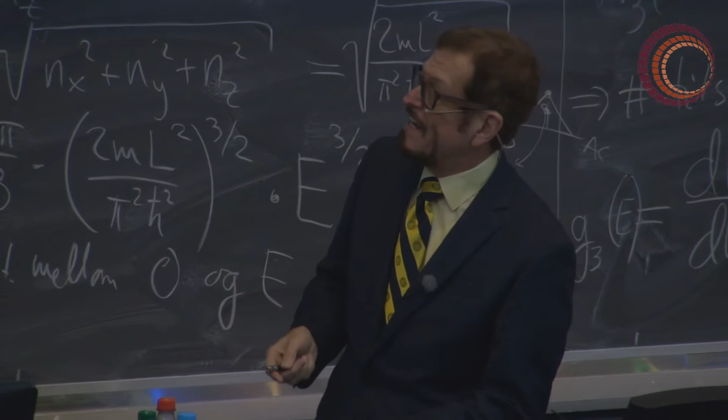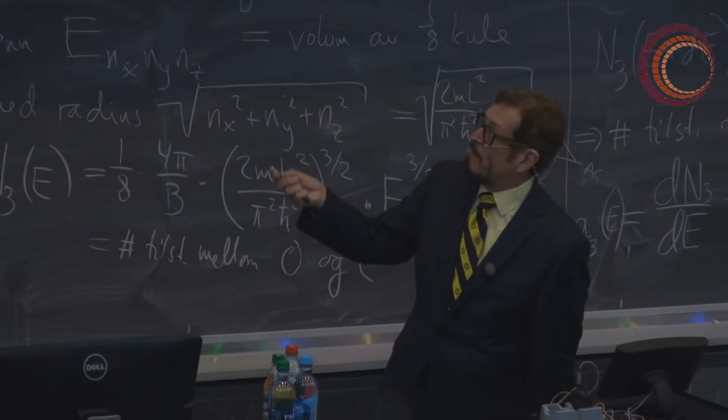One thing I find in all my teaching of physics is that even if you've never taken a physics class before, you're an expert in physics. You're guaranteed to be, because even if you never took any physics before coming to university, you have 18 years of practice doing physics: running, jumping, skiing, turning switches on and off, catching baseballs, and you put together in your head a common sense picture of the physical universe. And the problem is it's completely wrong.

And that's part of the reason why learning introductory physics is so hard, because you have all these incorrect ideas in your head. That's why in our textbook, we have lots of so-called caution paragraphs alerting you to common misconceptions. We're going to try to see what some of those common misconceptions are today associated with flying. And we'll introduce some new ideas for you as well.

So we're going to talk a little bit about what it is that makes an airplane fly. There are lots of misconceptions associated with that. We'll introduce the idea of lift, the force that, for the kind of flying we're talking about, acts vertically against the force of gravity. We'll talk about drag, which we'll find is more than just air resistance. Unlike air resistance, which gets more important the faster you go, there's an important type of drag that gets more important the slower you go. And we'll talk about why different wings are shaped in different fashions for different purposes.

So let's begin with the question of what is it that makes an airplane fly? That's an excellent question. I know we have some really expert physicists here in the audience. So for instance, our friends here from Oslo, you can tell me what is it that makes an airplane fly? Not to put any pressure on you, of course.

It's the force that pushes it up. Well, that's part of it. That's part of it. Well, let's see. Some of the locals, what do you think it is that makes an airplane fly? Airflow or the wings. Well, again, that's part of it. Let's see. Are there any pilots here? Because I guarantee if there were pilots here, they would know the answer.

Particularly if you're a private pilot and you fly yourself, you know the one thing that actually makes an airplane fly is money. The statement goes, if God had meant man to fly, he would have given him more money. And it's also said, I know there's money in aviation because that's where all of mine went. So whether you're paying in kroner or paying in dollars, it is an expensive thing to do.

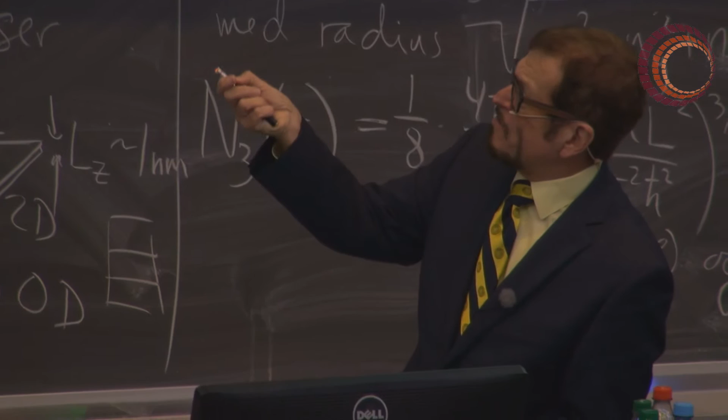Where does lift come from? If you look at detailed explanations of lift, you'll see all kinds of discussions that involve Bernoulli's equation, things that involve the Navier-Stokes equation, and it gets really complicated. But fundamentally, the simplest way to think about lift is it's Newton's third law of motion. And the third law of motion says if A pushes on B, B pushes back on A with exactly the same amount of force in the opposite direction. And that fundamentally is what the wing does.

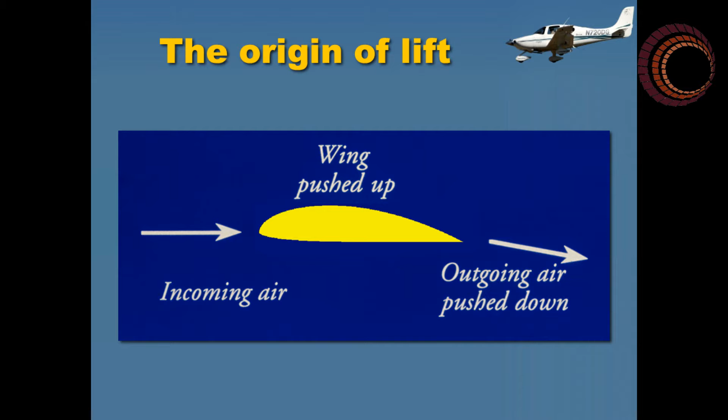The wing is simply a device that takes the air, from the frame of reference of the wing. If you're sitting in the airplane, the air is rushing toward you, and all the wing does is take it and push it downward. So because the wing pushes down on the air, the air responds by pushing up on the wing. And fundamentally, there's nothing more to it than that. That's all the physics there is, really, for the physics of flight. But there are a lot more details with that, of course.

Well, here's some really good discussions going on here, which is great. And actually, as I say, that's the way I teach my classes. Most of the time in my classes, the students are actually discussing physics with each other. And I'll do that with a class of 300 students, so it's a pretty exciting place to be. And this is a pretty exciting place to be because I heard all these great discussions going on.

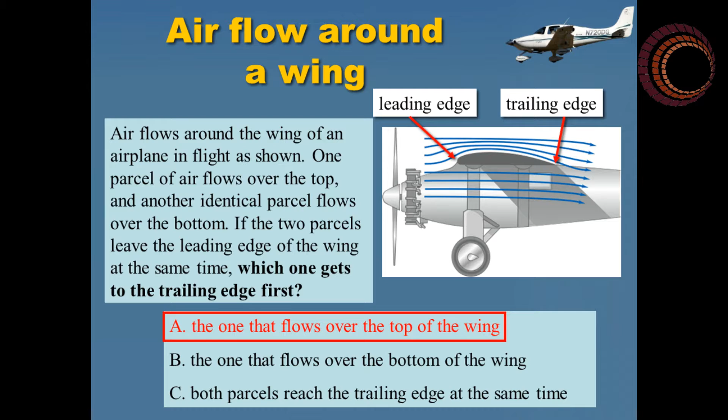The air that flows over the top of the wing actually goes much faster than you might be led to believe. Some people think that because the top of the wing is curved, the air has to travel a greater distance to meet up at the trailing edge, and that's why it goes faster. In fact, the real speed is much faster than that simple model would lead you to believe.

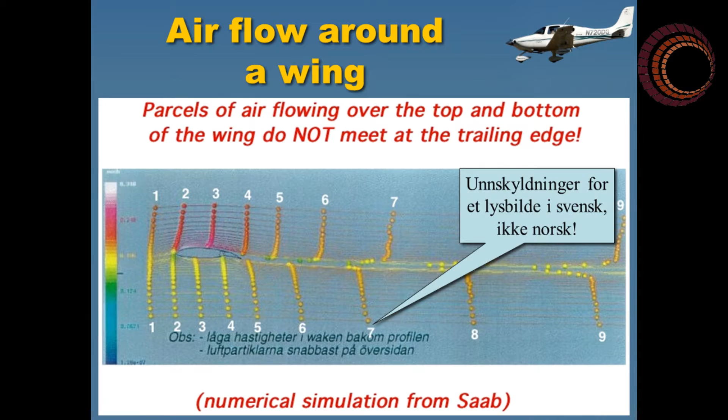And when I show this slide, in the States, people just say, what is that funny language? For you guys, you know what funny language is, but I do have to apologize, of course. But the best I could do.

So air definitely goes faster over the top, and really only the air heals up quite some distance behind the wing. And we'll talk later on about what happens some distance behind the wing. So now we have this picture of what's actually happening with the air. It's going really fast over the top and getting deflected downward because of the manner in which the air flows. It turns out a big part of getting the wing to push the air downward is, in fact, the wing shape. So let's talk a bit about the wing shape.

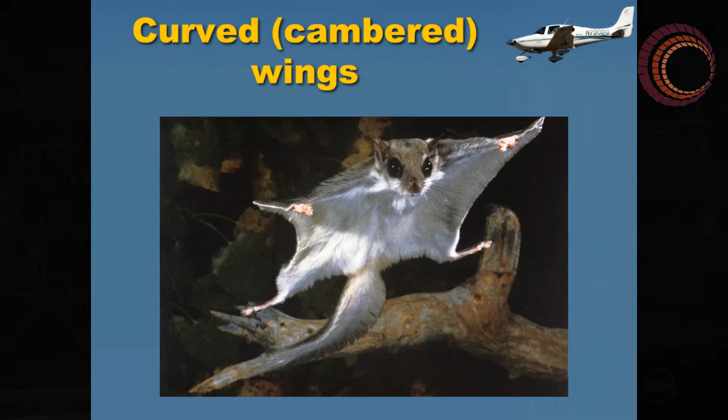In fact, here's a natural wing. This is what you find on a flying squirrel. And you'll find these across northern Europe as well as in the United States. These guys don't really fly. They just sort of glide in a controlled fashion. This is a species of squirrel that will climb up one tree, and instead of having to walk down to the ground to go to the next tree, it says, that's too hard. Let's just fly from one tree to the next.

And so he has this natural wing, and you'll notice we say it's cambered. So it's curved down at the front, so from the side it'll have a curvature like this. And that turns out to be a natural form that as the air follows the curvature of that wing, it'll naturally get pushed downward, and that produces a lifting force that enables this guy to glide.

That's why the earliest airplanes were biplanes, ones with two wings, because they thought the wings had to be very thin in order to be efficient, like the wing of a bird or like the wing of a flying squirrel, and they didn't know how to make a wing that was both thin and strong.

It was actually only during the First World War, actually from research in Germany, that they discovered that no, a thick wing can actually be just as efficient, and that led to the transition from two-winged airplanes to the single or monoplane airplanes that we have today, where you can have the wing thick enough to have enough internal structure that it will hold itself up without this kind of bracing.

It also depends on the dynamic pressure. And that's the pressure you feel as you're running along or you're skiing at high speed or bicycling at high speed. That's the pressure you feel on your face. Mathematically, the dynamic pressure is 1/2 rho v squared, that factor that shows up in the Bernoulli equation, and which depends on the density of the air and the airspeed.

So the greater the air density, today the air is relatively dense because the air temperature is low, so the air density is high, and the faster you go, the more dynamic pressure you're going to get.

Also, any good physics equation has to have a fudge factor. There has to be a factor inside that absorbs everything that's too complicated to write down in a simple equation, and that is what we call the lift coefficient. That depends on the way the wing is shaped and also depends on something called the angle of attack. So what's that all about?

So angle of attack sounds very military, but it applies to both military airplanes and civilian airplanes and to birds as well. It's the angle between the relative wind and the chord line. The relative wind, if you're sitting in the airplane, is the way the wind is blowing over you. So if you're in straight and level flight, that direction is horizontal. You'd see the wind coming toward you going horizontally.

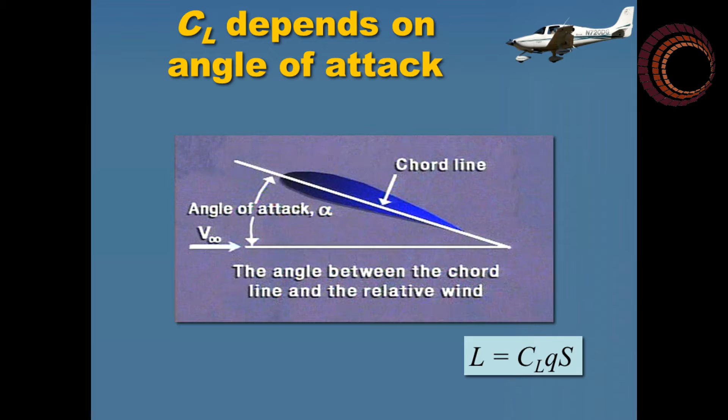And the chord line is an imaginary line from the leading edge of the wing to the trailing edge of the wing. The wing may be curved, but you think of this as just a straight line from the leading edge to the trailing edge. So the angle between those is called the angle of attack. So if the wing is biting into the air at a steeper angle, that's a large angle of attack. If the wing is at a relatively small angle, that's a small angle of attack.

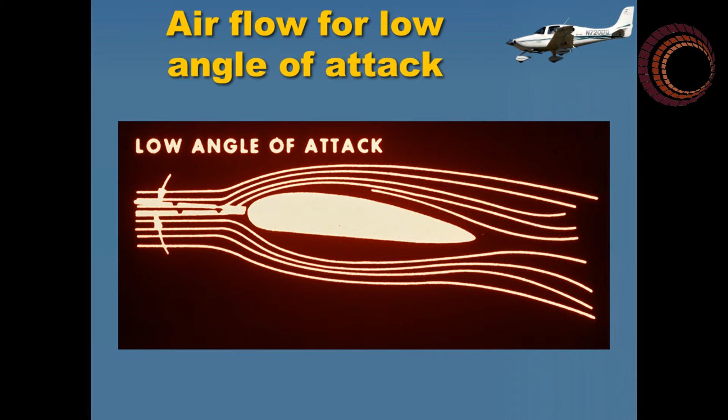So how does the lift coefficient depend on that? Well, generally speaking, to get more lift, you want to increase the angle of attack. At a low angle of attack, you can see in this illustration, the air gets pushed downward, but it doesn't get pushed down very hard. But if I increase the angle, the air following the curvature of the wing will be pushed down by a steeper angle. You may be going at the same speed, so the dynamic pressure is the same.

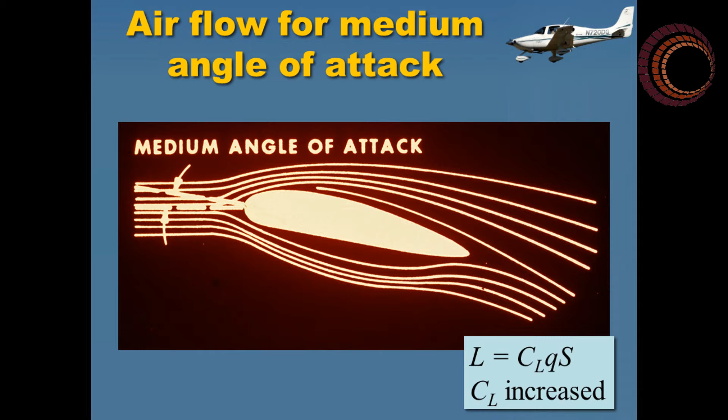You haven't changed the wing area, but by increasing the angle of attack, you've increased the lift coefficient, and you've now increased the amount of lift. So generally speaking, all else being the same, if you raise the nose a little bit as you're flying, you can get more lift out of the wing.

If you're flying slowly, you need to increase the lift coefficient. The reason is if you're flying slowly, as you might be when you're coming into land, at those slow speeds, you want to be going slowly so you can get stopped in a relatively short distance. You don't want to have to use 10 kilometers to stop the airplane because runways don't come that long. So you need to be going relatively slowly as you're flying along.

That means the dynamic pressure is decreased. Remember, the dynamic pressure Q is less the slower you're going. So at slow speeds, Q is less, so to make up for that, to keep yourself flying, you still need lift because Q is smaller. You actually have to increase one or the other factor. And in these airplanes, we're actually increasing both.

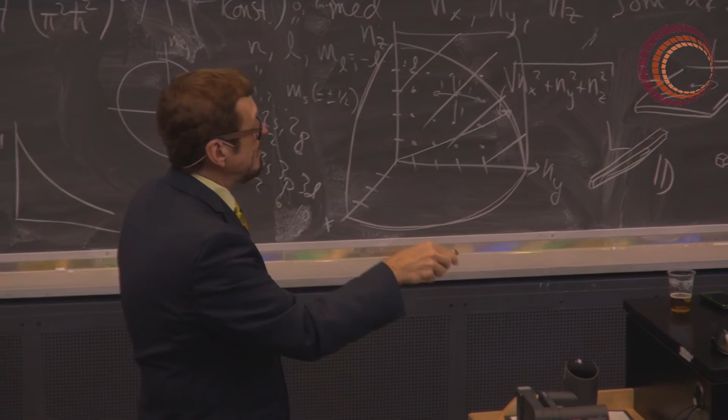And so he's at a low dynamic pressure because he's traveling slowly, but by increasing the lift coefficient and by increasing the wing area, that's just what it takes to enable slow flight. So it's exactly the same thing that you see with an airliner coming into land, where they have the flaps down, increasing the wing area and increasing the wing curvature, so that both the factors C sub L and S are increased to compensate for that decreased dynamic pressure Q. So as I said, lots of analogies between airplanes on the one hand and birds on the other.

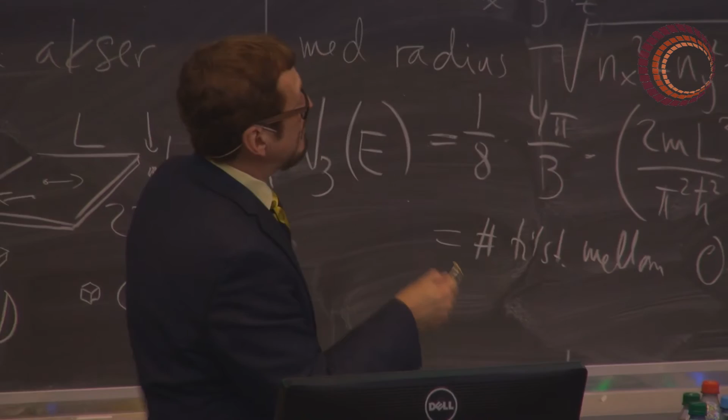To see more about this stuff, the ideal thing to do is say, let's go for an airplane flight. So if I had a little more advanced planning for this talk, I would have arranged a sufficiently large airplane to take everybody. But, well, let's do something almost as good. Let's go fly in an F-16. So one way to do that, of course, is to talk to our friends at the Royal Norwegian Air Force and say, I have some friends who want to go for a ride. Can we make that happen?

And so he could just wander over to Ørland and say, can I get a ride in one of these airplanes? A bunch of times you fly around with nobody sitting in the back seat, so can I take my friends along? And they might not respond in a positive way. But nonetheless, we can imagine doing that.

So imagine we're over there, and we're holding short of the runway, ready to take off, and you'll notice one thing you find on any of these jets is a large display in front of the pilot, and that's called the heads-up display. And that heads-up display is actually arranged so that the pilot doesn't have to look down at the instrument panel to see what's going on. The pilot instead can look straight ahead while flying the airplane and see the key information projected up there.

So in particular, on this heads-up display, so-called because you can keep your head up, you don't have to look down to see the key information you need, we're actually going to use the heads-up display. We're going to do an experiment. And the experiment we're going to do is we're going to take an F-16, and we're going to bring the power back to idle. So the airplane is going to want to slow down, and we're going to tell the pilot, okay, the power is back, your airplane's going to be slowing down, but let's maintain the same altitude. What will it take to do that?

So based on what we said, as we slow down, the dynamic pressure, Q, is going to decrease. So we're going to have to compensate by increasing the lift coefficient, C sub L. And to increase that lift coefficient, I said that that should increase with an increasing angle of attack. So let's see whether that's true or not. So we're going to look through the heads-up display as we do this. And so here's what we're going to see on the display.

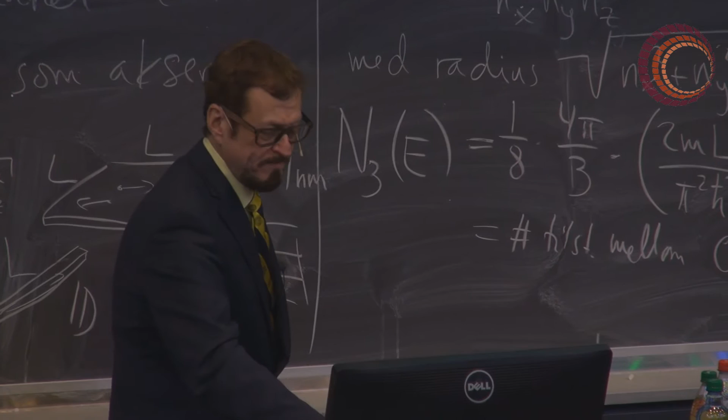So in the video I'm going to show you, you'll see both the heads-up display the pilot sees, and we're also going to see the airplane as viewed from the side to see the way it looks as seen from outside. So we'll get both inside the cockpit view and outside the airplane view. The key numbers to look at over on the left-hand side, you'll see the airspeed calibrated in knots, which is a funny unit, but it's a little bit less than 2 kilometers an hour. Over on the right is the altitude in thousands of feet. I apologize for English units. Nothing I can do about that.

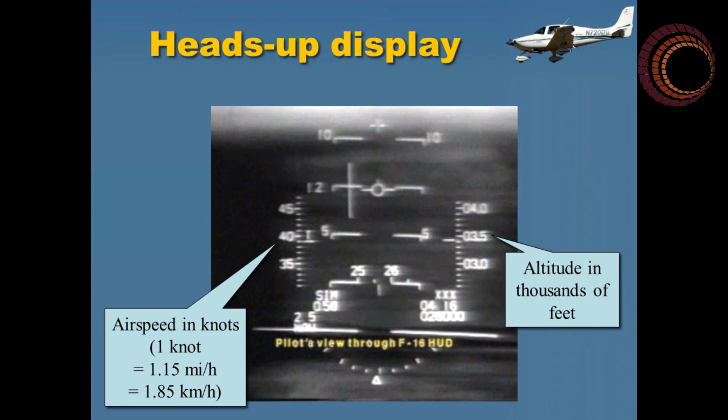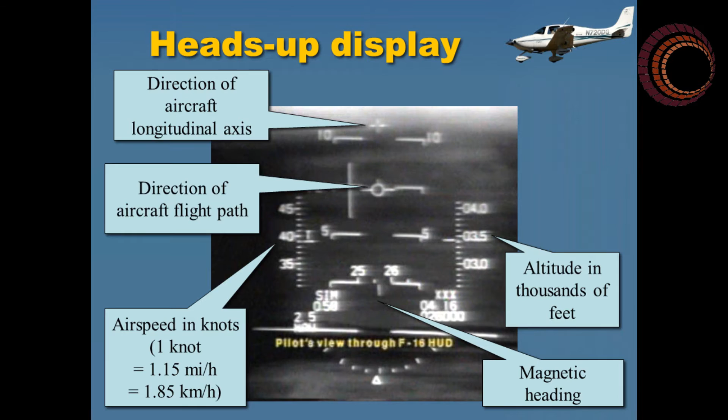We're also going to have our heading. Our pilot's going to try to keep the airplane going in a straight line, so that heading should remain constant. And the X will represent the direction of the longitudinal axis of the airplane. So basically, that's showing you where the nose of the airplane is pointed. Whereas the round circle is going to show you the direction that the airplane is going. The angle between those two directions, that's the angle of attack. Basically, it's the angle between the way the airplane is flying, which should be horizontal, and the way the nose is tilted up. The angle between those is essentially the angle of attack, the angle at which the wing is biting into the air. So let's see how that behaves.

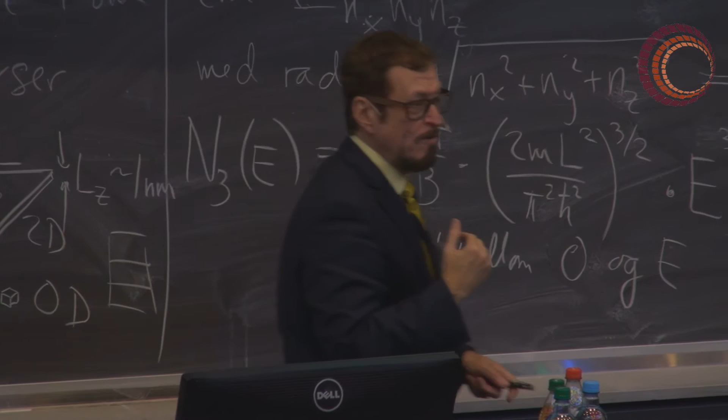And in particular, I want you to look at the relationship between the angle of attack on the one hand and the airspeed on the other. As the airplane slows down, we're going to find we're going to have to increase the angle of attack. We're getting less air per second flying over the airplane. And so to compensate for that, we have to take the air we encounter and push it down harder with that greater angle of attack. So let's see if that's actually what happens here.

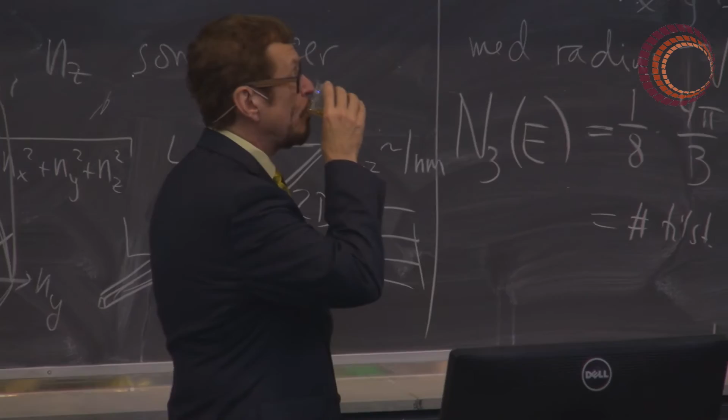What must a pilot do to maintain level flight when decelerating with idle power? Determine the relationship between angle of attack and true airspeed for this decelerating F-16 in idle power and in level flight. AOA is 3 degrees at the outset. True airspeed now 390. 3 degrees holding on the AOA. Coming down to 375, mark, 3.5 degrees on AOA now. AOA is angle of attack. Coming up on 350. Mark 350, AOA at 4.5. Disregard 3.5. Slowing to 325, ready. Mark 325, AOA is 4.2.

Coming up on 300. Mark 300, AOA at 5.5. Coming up on 275. Mark 275, AOA at 6.5. Altitude lost about 50 feet so far. Coming up on 250. Ready. Mark 250, AOA at 8. Coming up on 225. Mark 225, 9.8 or so on the AOA.

Okay. So what was that warning all about? Well, let's see. So here's kind of a graph that shows the behavior of the lift coefficient versus the angle of attack. And as we went slower, again, the dynamic pressure was decreasing. We're hitting less air pressure per second. And so we need to make the wing more efficient at producing lift. We need an increased lift coefficient.

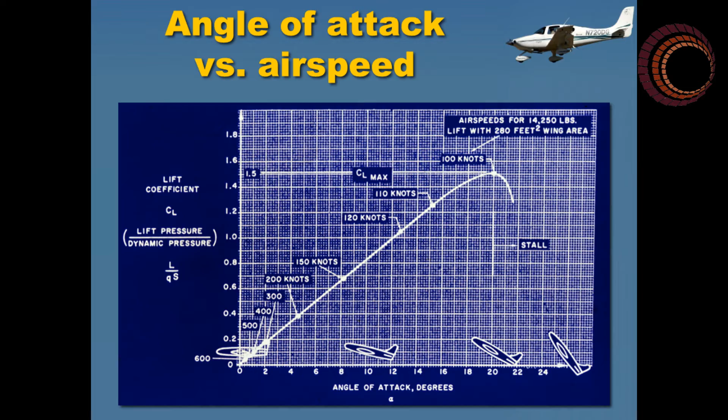And so here you can see the lift coefficient increases as the angle of attack increases. And that corresponds to slower and slower airspeeds as you go along. But you notice there's a limit to everything. If the angle of attack gets too great, all of a sudden the lift falls off precipitously. There's a huge drop in the lift. And that's actually what the warning was about. The warning was saying that your angle of attack is getting close to the point at which the lift is going to drop off. And that's a phenomenon called a stall.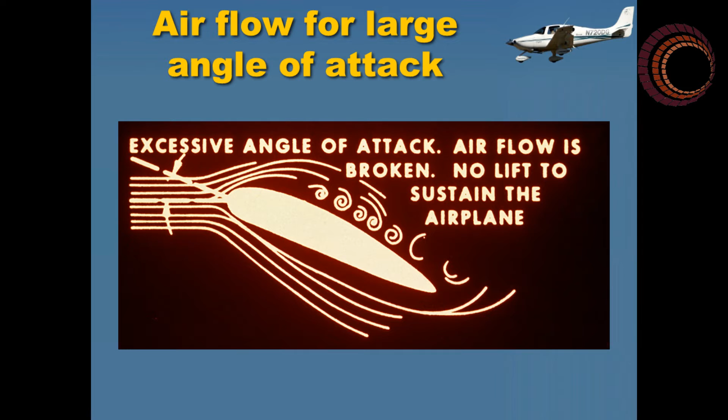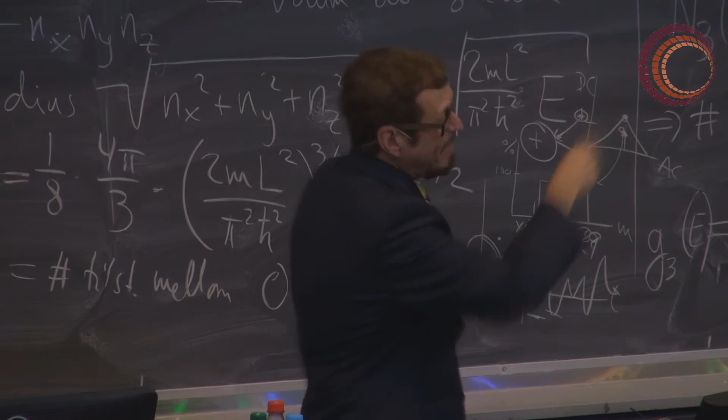And so what happens in a stall is you get this sort of phenomenon. The airflow flowing over the top of the wing, which previously had been in fairly laminar flow, becomes turbulent. And that turbulent airflow no longer is giving you that nice, well-behaved phenomenon where the air comes over the top and gets pushed downward. Instead, the air over the top says, forget it, I'm not interested anymore. I'm still getting lift because the air on the underside is getting pushed downward. The stuff on the top says, not happening, not going to do it. And so as a result, the lift goes away pretty dramatically when this happens.

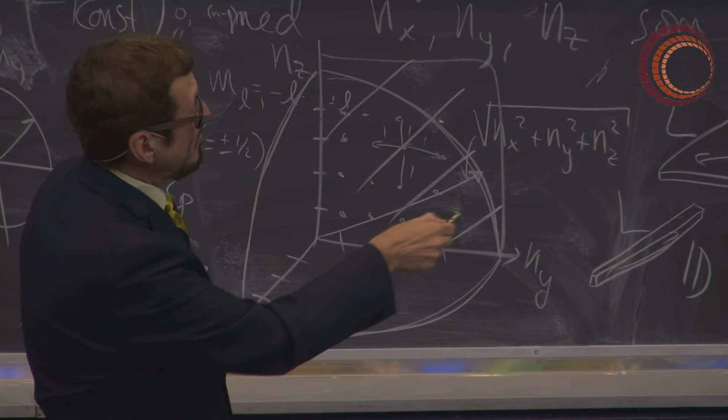So here's a question for you. Suppose you're flying along in your airplane, the nose gets too high, and all of a sudden the airplane stalls. So then what happens is, because the lift goes away, the airplane will start to descend rapidly. What do you do? Perhaps I should say, what's the second thing you do? I know for many people what the first thing they do is, but the second thing you do, many people would say, oh my gosh, I'm heading toward the ground. They'll take the controls and they'll pull back to try to lift the nose up.

That just makes it worse, because then you've just increased the angle of attack even more. So you have to do something that's very counterintuitive when you first learn to do this. Because you're going down, you have to push the nose downward. And that reduces the angle of attack, so then you're just in a dive, and then you can recover from the dive, hopefully with enough altitude.

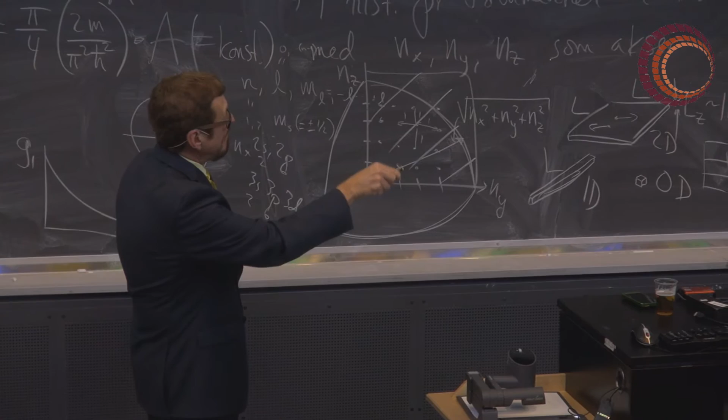And look at the top of that wing. You'll notice these feathers are sticking outward. And that's because they're actually on the verge of a stall. Just like an airplane should stall just before landing, this bird's doing the same thing. In fact, you can see, here's the direction he's actually flying, here's the angle of his wings, and the angle between those two things, the angle of attack, you can see is quite a large angle. Because of that large angle, he's actually close to getting a stall, and you can see those feathers deployed upward.

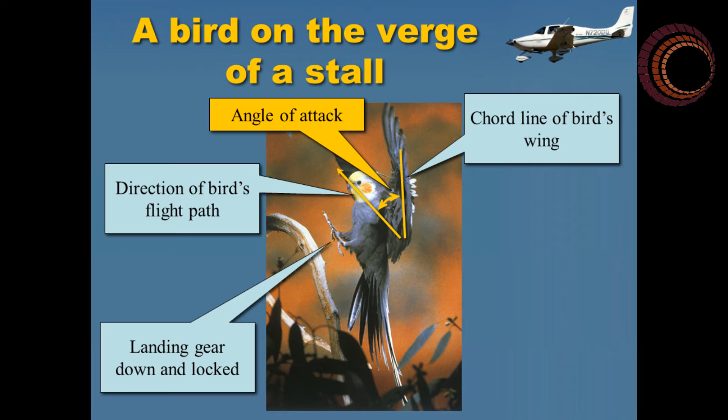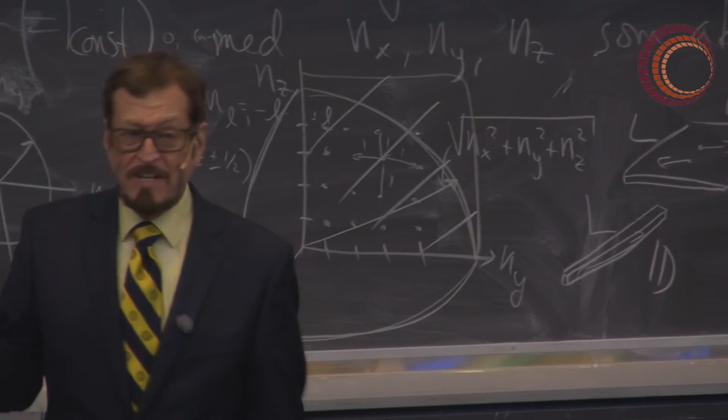And like a good pilot, he has the landing gear down and in the locked position, so he's ready to make a good landing. Stalls are a good thing if you're coming in to land, but if you're trying to fly slowly, you want to prevent stalls from happening. You'd like to fly as slowly as possible without actually stalling the airplane, or in this case, stalling the bird. So what can you do about that? Well, this bird actually has an interesting bit of technology to delay the onset of a stall.

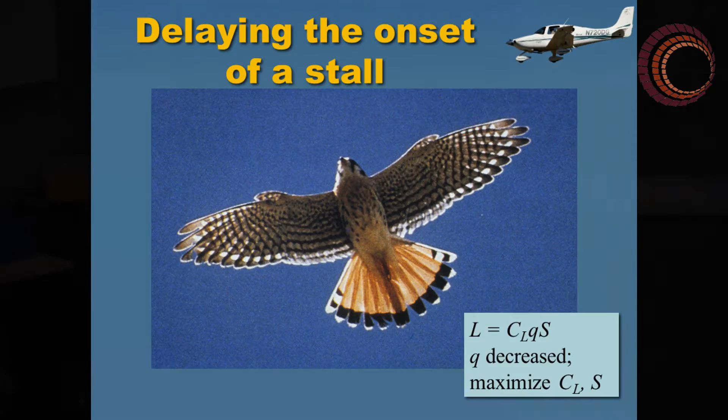Again, bird of prey looking for something to eat on the ground, trying to fly as slowly as possible. So because he's flying slowly, the dynamic pressure is quite low, trying to maximize the wing area. The tails are stretched out, the wing is stretched as far as it can, and maximizing the lift coefficient by flying at a high angle of attack. But again, if that angle is too great, you can stall the wing, and then he just falls out of the sky. Sometimes you'll see birds of prey do that. They just kind of tumble off on one wing due to just this happening.

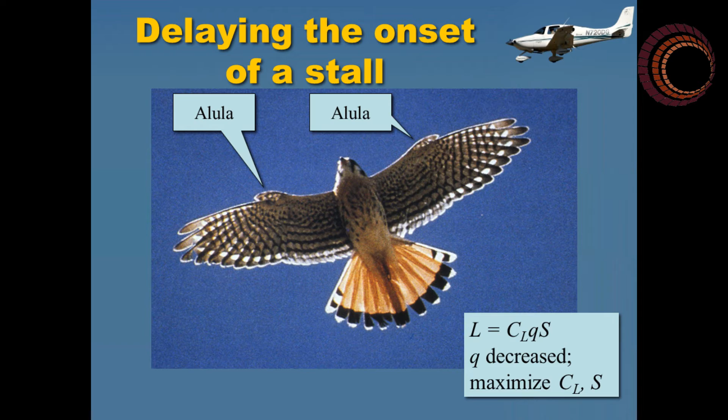But how can I fly even more slowly? Well, look at the very front of the wings. There's things that seem to be sticking out. If you think of the hand as being like a wing, it's like his thumbs. And that's actually a structure on birds called an alula. Wonderful name. And what does that alula actually do? Think of air as it goes through the alula. It actually makes a little slot.

So as the air goes through there, think about the equation of continuity. For an incompressible fluid, when it goes through a narrow slot like that, it has to speed up. And that faster air going over the top can more easily adhere to the upper surface of the wing. By giving that air more kinetic energy, it's more easily able to follow the curvature of the upper surface of the wing. And that means the air, instead of separating from the wing, remains in contact with it, and that delays the stall.

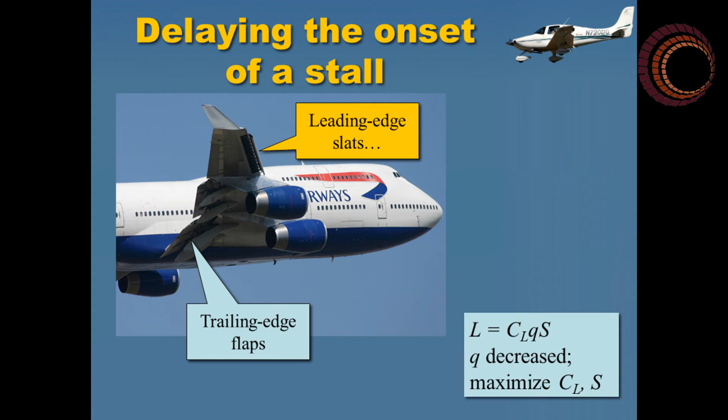And by the way, you can see those same structures on modern airplanes. There we don't call them alulas, we call them leading edge slats. The flaps come down at the back, as we talked about before, to increase the wing area and the curvature. You also get some curvature from the leading edge slats, but they do something else. If you look close up, you'll notice there's a gap. And in fact, what happens there is exactly like the alula.

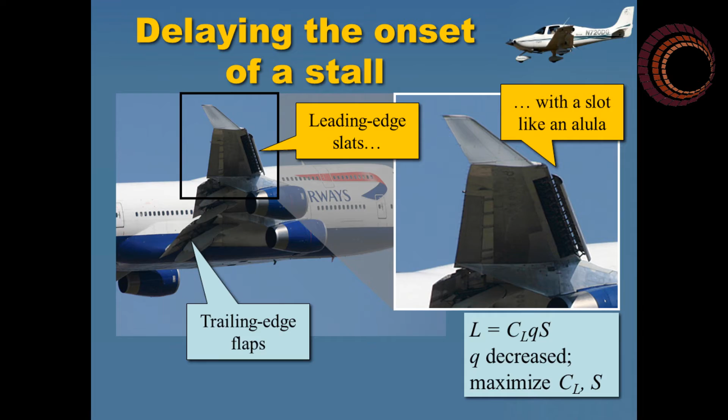It causes air on the underside to go through that slot, and it has to speed up. As a result, that air gets energized, remains in contact with the upper surface of the wing, and makes it less likely that a stall is going to happen. So you can fly at a slower speed and therefore land at a much slower speed as well. And they'll also use these on airliners for takeoff, because for takeoff as well, you want to take off in the shortest distance possible. So you want to be able to fly at a slow speed to get off the ground.

And again, preventing a stall at takeoff is a good thing to do as well. The leading edge slot was actually invented just about a century ago, and it was only later on that they discovered that, oh wait, these things exist in nature as well. So it's a wonderful example where technology thought it was being innovative, but in fact evolution had come up with the idea a few million years earlier.

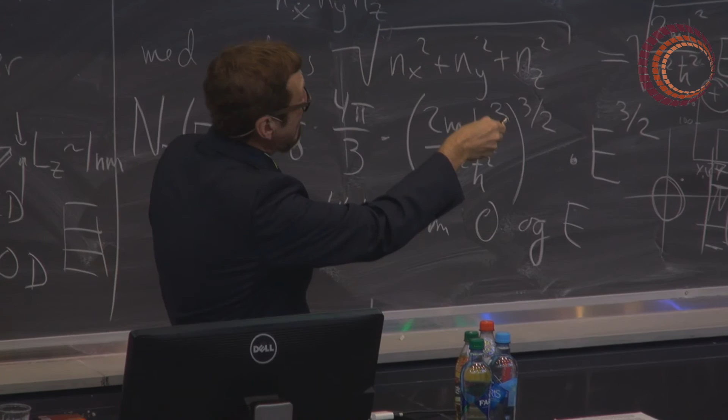So for a more gentle descent, that says you actually want to minimize drag. So keeping drag minimum is actually useful for a variety of things. You might think I want to keep drag to a minimum so I can go fast, but it also helps you to be a better glider as well. And it turns out there's a couple kinds of drag. The one we're most familiar with is called parasite drag. And that's a combination of pressure drag. Pressure drag is what you feel pushing you backwards when you stick your hand out of a car window when you're going fast on the motorway. It's the pressure of the air pushing back on the flat of your hand.

And there's also viscous effects, because air has some viscosity. That means that the air actually will adhere to the airplane. And so as you're going along, you're actually dragging some air with you. Viscous drag is why we have car washes. If you didn't have viscosity with air and your car was dirty, you'd say, that's fine, I'll just go drive at 100 kilometers an hour. That'll blow all the dirt off. And in fact, you could drive on the motorway at 100 kilometers an hour, or looking at this crowd, much faster. And you come back, the car's even dirtier. And it's because of viscosity, because the air right next to the car is not moving relative to the car. In fact, all that dirt just piles up instead. And so that contributes as well to the drag force on any moving vehicle going through the air.

But the other one, the one that's kind of surprising, is this thing called induced drag, or drag due to lift. So we'll talk about both of those. Parasite drag in general, again, you need a good equation for that one. And for an airplane, it's mostly determined by the wing. Most of the drag actually comes from the wing itself. The bigger the wing you have, the more drag you have. The faster you're going, the more drag you have, the more dynamic pressure. And again, there's a drag coefficient that's kind of determined by the shape of the wing. And again, it depends also on the angle of attack.

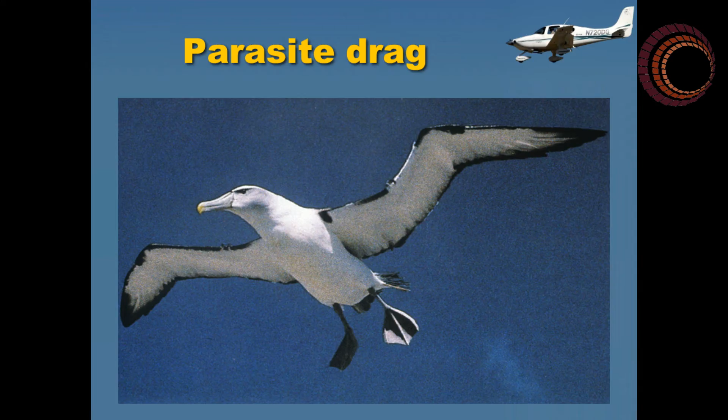Parasite drag is something you can actually modulate. For instance, this albatross is following a ship that has fish on board, and it's kind of interested in the fish, as you might imagine. And to regulate his speed, he actually puts out his air brakes. By modulating those, he can actually control how much drag he has so he can keep up with the ship that he's trying to follow. So there, by changing the overall shape and the amount that he presents to the air, he can actually regulate the amount of drag he encounters.

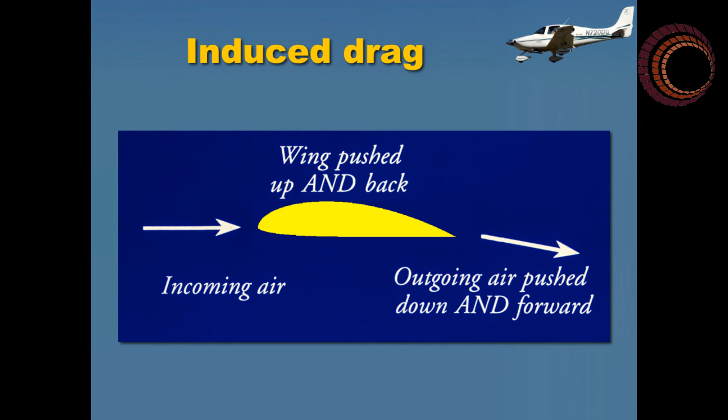But there's also this induced drag. And that's the funny one that people don't normally think about, because it's something you only find associated with wings. And it's called drag due to lift. If you think of this picture I showed you before, what happens to air as it flows over a wing, two things happen to it. If you just think of rotating the vector from horizontal to below the horizontal, two things happen.

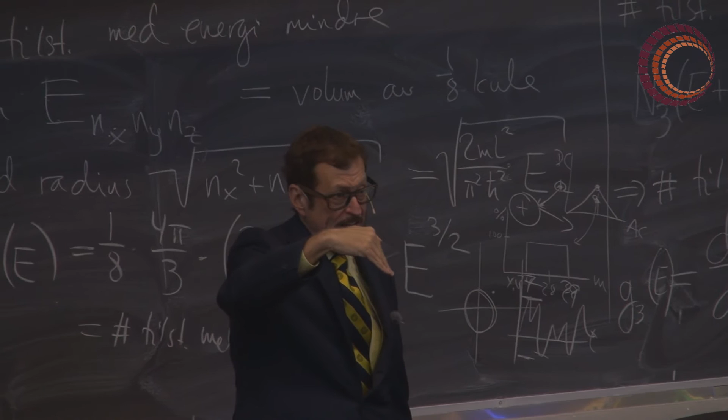One, it acquires a downward component, so the air gets pushed downward, but also because the magnitude of the air velocity stays the same, that means that the horizontal component has been decreased. In other words, the air has been pushed downward, but it's also been pushed forward. It has less horizontal velocity now. So because the air has been pushed forward by the wing, that means the air is actually pushing the wing backward. In other words, the wing is feeling a backward or drag force because of that deflection.

Another way to think about what's happening there is think about what happens out at the tips of the wings. As we said, there's high pressure on the underside of the wing, lower pressure at the top. What does air want to do when it has a difference between high pressure and low pressure? It wants to go from high pressure to low pressure. It actually goes around the wingtips. The problem is when it gets there, the wing is gone because the wing was moving forward.

So the air ends up going like this, and the air starts rotating. It acquires some rotational velocity. And so as seen from behind the airplane, you'll get this rotational effect associated with the wingtips. As seen from above, you actually get these two counter-rotating vortices that are coming off the wingtips.

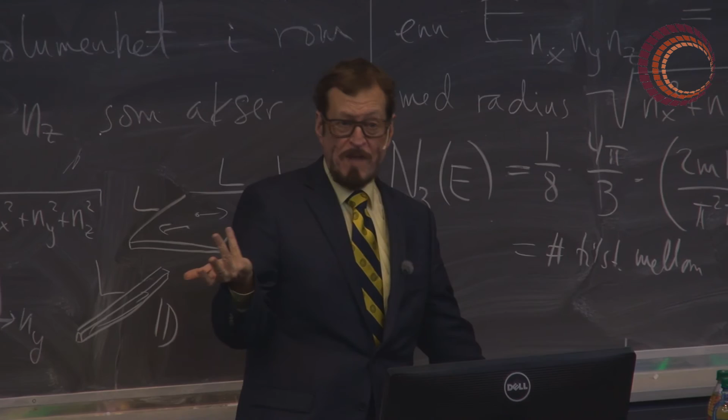It takes energy to make the air do that. Where's the energy come from? It must have come from the wing. So if you're getting energy out of the wing, that means the wing is having to do work, which means negative work is being done on the wing. And what does that do? It slows it down. So that's another way to think about where induced drag comes from.

And to show you those vortices, here's a little video. Here's a wing in a wind tunnel. And notice as I go to high angle of attack, you can really see that airflow from the underside to the upper side of the wing and producing a vortex behind the wing. And we can actually visualize that. If we take this airplane and fly it past the tower with smoke, you can really see that vortex showing up associated with the wingtip.

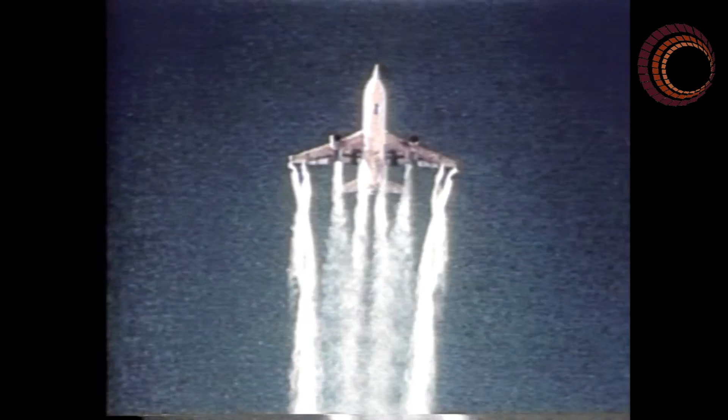Also in this airplane, we have smoke coming off the wings. You can see it kind of twirling around either wingtip, producing these very strong vortices. That's the reason why, if you're at a big airport and your airliner is waiting to take off, somebody else takes off in front of you, you wait a couple minutes. And what you're waiting for is for the vortices from the airliner in front of you to dissipate. Because those vortices can be very strong.

I've heard of small airliners being flipped over by the vortex from something like a Boeing 777. So that's why you wait a few minutes for those vortices to actually dissipate from the airliner in front of you. Here's another way to visualize those vortices. Here's actually an aerobatic team flying through some of their own smoke. And you really see those vortices being produced downstream and also coming off the wingtips themselves.

Here's another great picture of an airliner that's descending through a cloud. And you can see those two counter-rotating vortices, one off of the left wingtip, the other one off of the right wingtip. So you're really seeing that effect of these wingtip vortices, and that has a lot to do with producing the induced drag. In fact, if you look at the whole picture of the way that air flows around the airplane, here's actually a picture.

Imagine this not from the frame of reference of the airplane, where we think of the air as flowing over the wing, but instead imagine this from the frame of reference of the air itself. So as the airplane goes past it, what you actually see is there's a circulation of the air around the wing, these vortices trailing aft, and actually some distance behind that to conserve angular momentum, because you've given some angular momentum this way over here, you have to have the opposite sense of angular momentum back here.

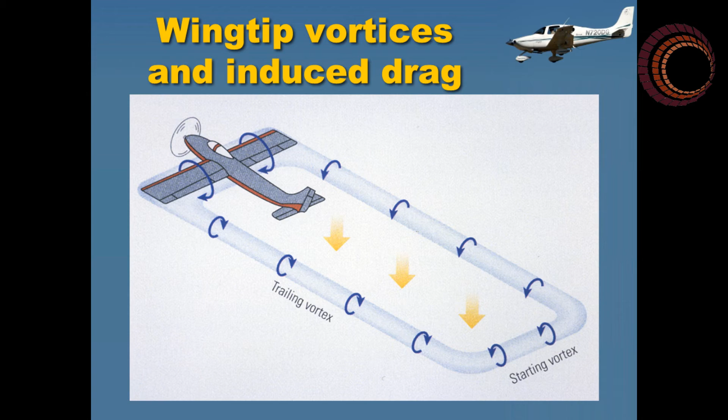So it's actually like this big horseshoe that connects around behind the tail of the airplane. And there's a net downward flow through the middle of that. So the wing has this vortex actually attached to it, and that's what pushes the air downward.

So it's rather more complicated than our simple picture of the way in which lift works. But it does take energy to make those vortices, and that corresponds to drag. Interestingly, as we saw from the video, at greater angle of attack, the vortices are stronger, so the induced drag is stronger. When do you have a high angle of attack? When you're flying slow. So in other words, this kind of drag is more important when you're flying slowly.

And you can see that in this picture here, or for this equation. Here the induced drag, this drag due to lift, is inversely proportional to the dynamic pressure. Dynamic pressure is more important the faster you go. So at slower speed, Q is small, and therefore your induced drag is going to be big. So this is one that's actually more important the slower you go.

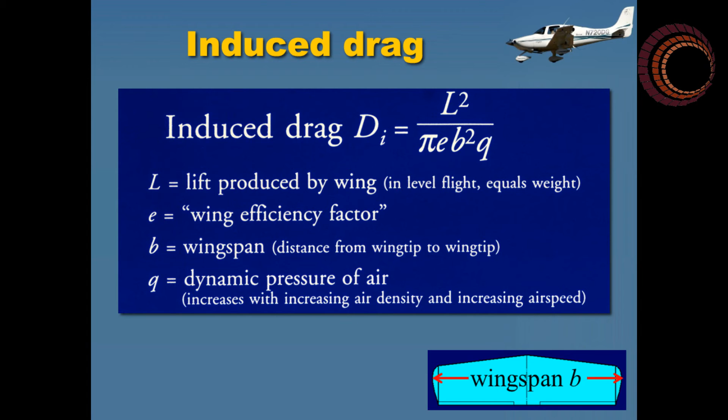You also notice it depends on the wingspan, the distance from one wingtip to the other one. And the longer the wingspan, the less induced drag you have. That kind of makes sense. We saw this happens because these vortices happen out at the wingtips. If B was infinite, if you had an infinitely long wing, there's no wingtips. And you can see if B is infinite, this goes to 0.

So one way to eliminate induced drag is use an infinitely long wing. But of course, the problem with an infinitely long wing, it takes a long time to build. And you need an infinitely large runway to taxi around on. So it has some disadvantages.

So here are these two types of drag. Parasite drag, important when you're going fast. Also more important in dense air, because that'll also increase the dynamic pressure. And it's also important if you have a really big wing. Whereas induced drag is going to be important when the wing's generating lots of lift. That'll happen both for a heavy airplane and also for one that's doing a tight turn. We're using the lift to make the airplane turn.

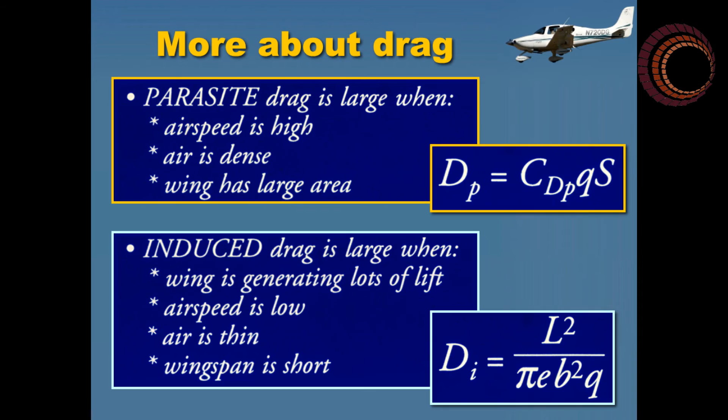It's important when you're going more slowly, so Q is small. It's important in thin air, because in thin air that also gives you less dynamic pressure, so you have a smaller factor Q in the denominator. And it's also important when you have a short wing. So all these factors play a role in these different types of drag.

Since parasite drag increases as you go faster, and induced drag increases as you go slower, that says the total drag has an interesting shape. It's a curve that's high at high speeds, high at low speeds, and the curve kind of ends where you get to the stall. But there's a speed at which you get minimum amount of drag. And that's an important speed. That's where, to make the airplane fly, it takes the minimum amount of thrust. Which means if you have more thrust than that, you can use it to make the airplane climb.

So that's actually the speed of minimum drag. That's actually the speed you fly at to get the best climb rate. It's also the speed, since we saw minimum drag gives you the best glide angle, that if the engine stops, and you want to be able to glide a long distance to find a safe landing spot, that's the speed you want to assume. So that's the speed at which the airplane is most efficient.

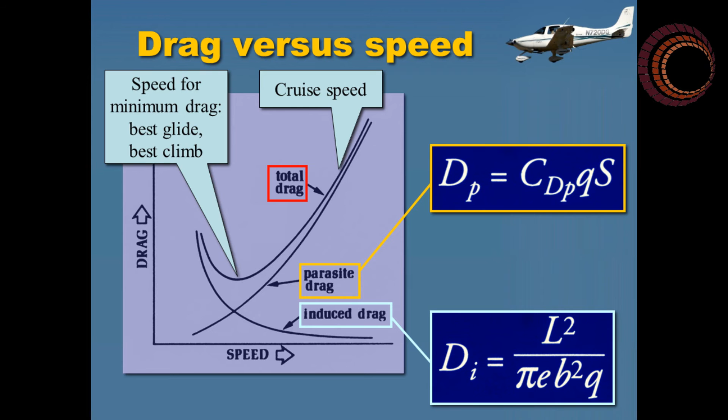So what's the speed at which airplanes actually fly? That's actually up here. And the reason we do that is because the whole point of an airplane is to go fast. And so you go as fast as you can, consistent with how much money you want to spend for fuel and the engine and all that. But if you say, you know, I think we're kind of running low on fuel, maybe we should slow down to this speed. That'll actually help you to maximize the distance you can travel as a result.

To minimize the induced drag, that's important if you're in an airplane that's flying slowly. So for instance, here's a World War II German observation plane designed to fly slowly. So what did it do? It had really long wings, really large wingspan. That minimizes the induced drag because this guy's flying so slowly, induced drag is important. Induced drag is important when you're flying slowly, so you need big wings to do that.

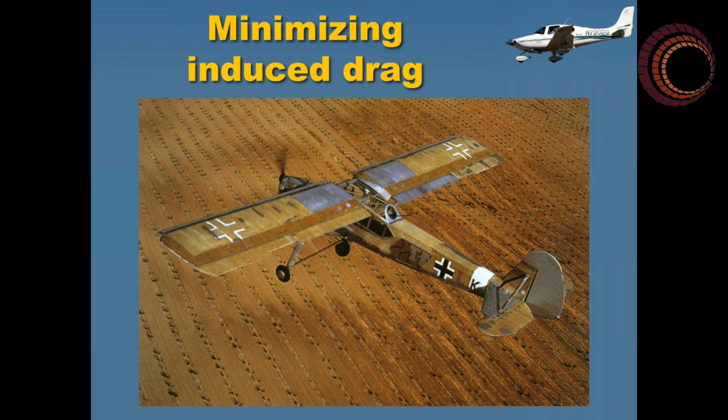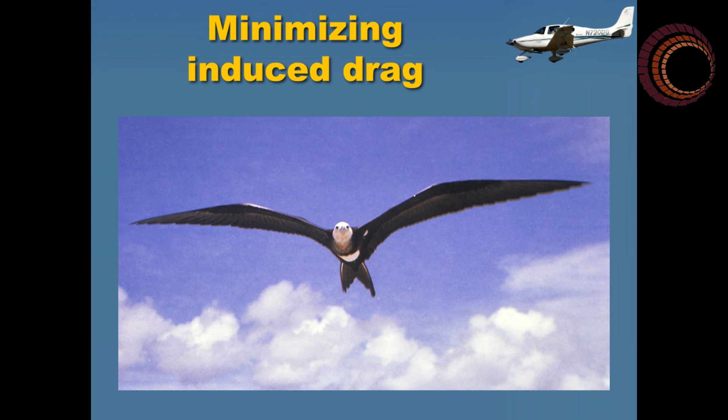Because he also likes to fly at low airspeeds where induced drag is important. So to do that, you maximize the wingspan. Also, you notice the wings are tapered. And tapering the wing, as it turns out, also decreases the induced drag. Remember, the induced drag is increased because of air flowing around the wingtip. If you make the wingtips very gradual, where the wing curve gradually goes away to nothing, that will also minimize the vortices. And so this guy evolved this millions of years ago precisely to minimize induced drag.

And at high altitude, the air density is less, so the dynamic pressure is quite low, and at low dynamic pressure, induced drag becomes important, whether you're flying fast or not. And so that actually gives you this very distinctive feature of these guys.

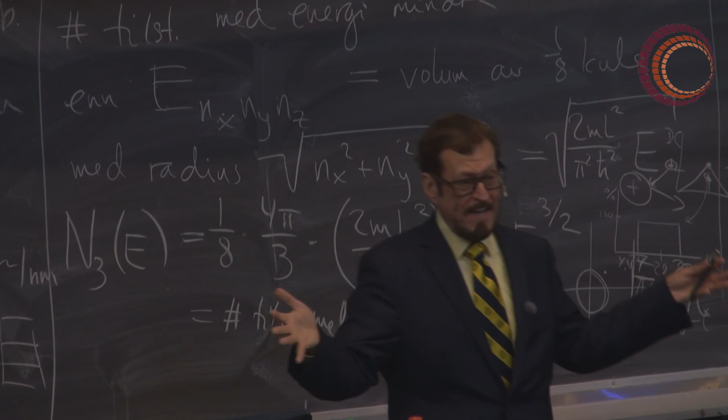As I said, increasing the wingspan is really useful. One problem you have, of course, if the wing is too long, it's hard to fit it into the spaces available at an airport. Turns out you can do almost as good if you take the ends of the wing and you bend them upward. And that effectively gives you that same increased wingspan. And that's why in a lot of airliners you'll see these winglets.

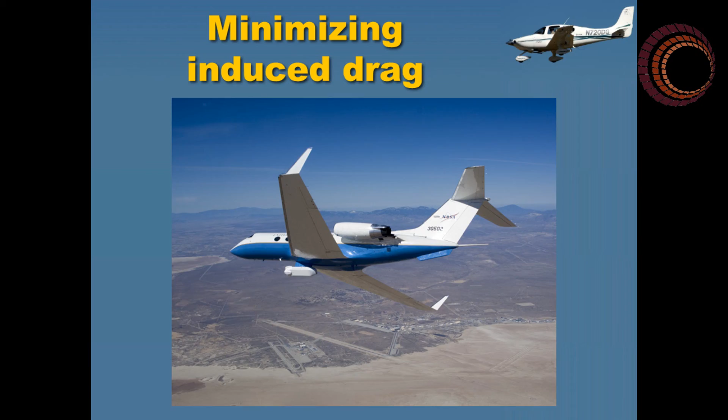And basically they have almost the same effect as just extending the wing, but there's structural advantages to not having the wing really be that long. But it gives you much the same effect. It tends to decrease the wingtip vortices, hence decrease the amount of induced drag. Recently, several airliners have added these to the wingtips. It increases the fuel efficiency by about 3%.

You might think, well, that's not that much. But if you look at the way airline economics works, 3% savings makes the difference between whether the airline stays in business or doesn't stay in business. So they like to stay in business, so making those changes has actually been very helpful for them. Is that a new innovation?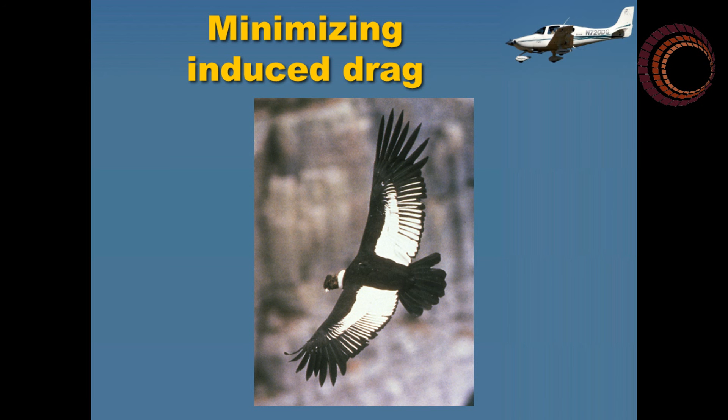In other words, it's designed to minimize induced drag so that this guy can fly along at a low airspeed, not need to flap his wings very often. As you can imagine, to flap wings that big takes a lot of effort. He'd like to do it as infrequently as possible. And so to make that happen, he makes sure the wings are stretched out as far as he can to minimize the induced drag, splay these things out like winglets on an airliner. And so therefore he can fly around and look for something attractive to eat on the ground while this is happening.

So lots of cool features you'll see similar to the way that birds fly and the way that airplanes fly. Of course, one thing that's dramatically different is that birds fly by flapping their wings. If you're in an airliner that flaps the wing, you might want to try a different airline. Totally different physics associated with that. I haven't said anything about flapping flight. Flapping flight's really quite amazing and much more complicated. Haven't said anything about turning flight, or the wild things that happen in an airplane that's actually in aerobatics.

But as I said, straight and level flight, like I've been talking about, is the best paying form of flight. And so that's a good one to concentrate on. And if you understand that, then you can go on and actually study all the rest.